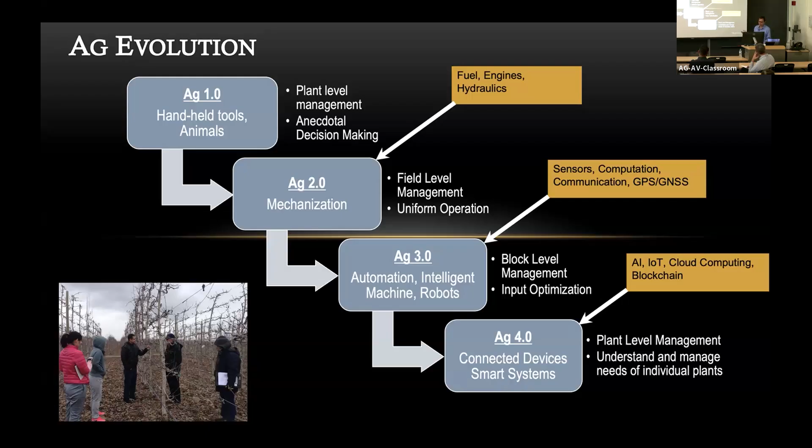So that kind of capability brings us to what we generally call agriculture 4.0, or fourth generation of farming, sometimes also called smart farming. So going back, bottom left, I'm posing some 10 years ago in my village, again, in the mid-hills of Nepal, in animal-driven agriculture. Earlier, I said that farming was that way when I was growing up many decades ago. Actually, it's still happening the same way.

So that brings me to this point that in most of the other industries, such as manufacturing, when we graduate from one generation to the next, it almost happens about the same time throughout the world. When I say that, in the larger scheme of things, it may be lagging by a decade or 15 years, but we're talking about advancement or graduation from first generation farming to second generation some 100 years ago when we developed these bigger machines. But some parts of the world, and in fact, actually many parts of the world, are still in the first generation of farming.

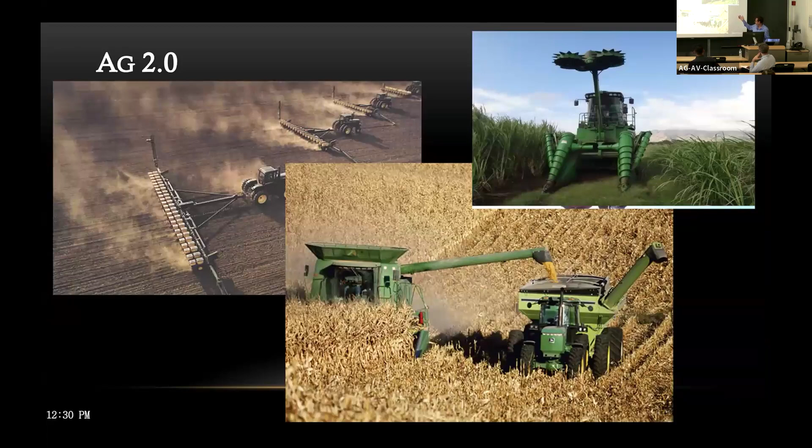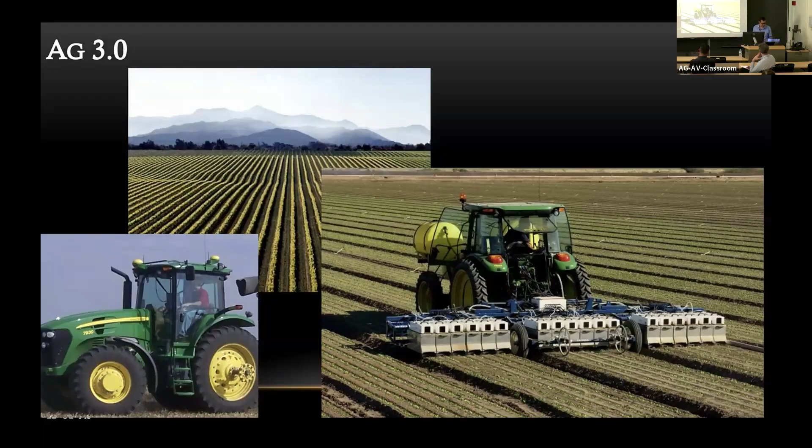That means all these generations, handheld, tool-based, animal-based agriculture to bigger machine-based agriculture, where we are using these really gigantic tractors and combine harvesters and planters, these auto steering technologies I mentioned earlier, some other automated robotic machines for weeding, for example—there have been quite a bit of successes in automating weeding operation. All these generations of farming are happening simultaneously around the world. And that's kind of the interesting aspect of the agricultural industry.

And then when we put all these concepts and technologies together, that leads us to this next generation that we are currently in or are trying to go into, the fourth generation of farming, which incorporates the concept of precision management, management at individual plant level or very small units, so that we can maximize the productivity and quality of that individual plant or animal.

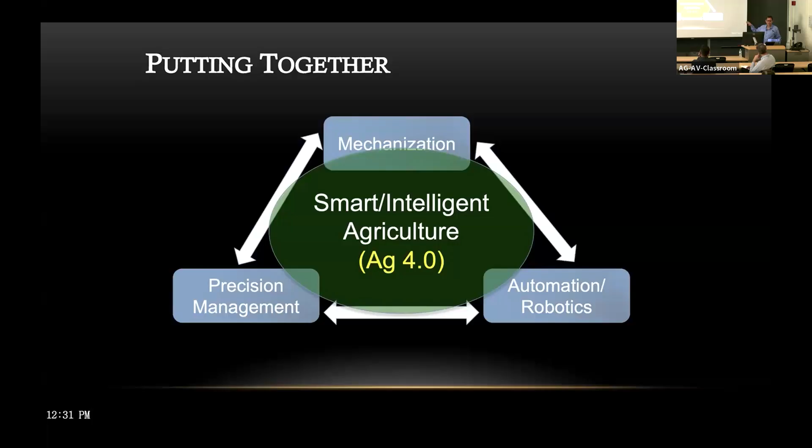With that historical perspective behind us, I'd like to talk a little bit about how artificial intelligence and cyber physical systems interact and help us in farming. CPS stands for Cyber Physical System, which is basically a connected world where sensors, humans, machines, plants, animals, soil - all things are connected to each other and talking to each other. Cyber physical system infrastructure provides us that capability to connect everything within farming.

Then these technologies can be used in almost everything that we do in our lives, and agriculture is also not an exception. We do utilize these technologies to perform plant and environment assessment, make farming decisions, implement those decisions, and analyze the outcomes.

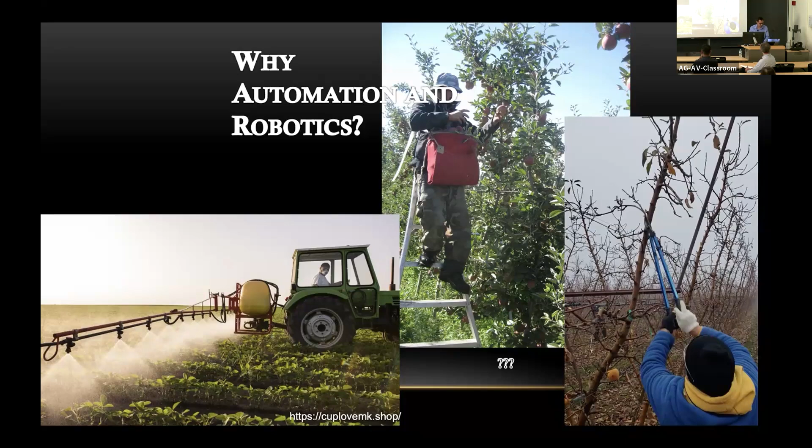And we would like to create jobs in manufacturing, supervising, monitoring, and maintaining automated machines, while having these jobs completed by those machines. So that's the philosophy and the motivation behind what I do.

There has been long research and development in this area, but only limited commercial success. A few areas are making progress, such as automated robotic weeding. But there are a lot of other areas, such as robotic picking of fruit and vegetable crops, where we have not been successful so far in commercially adopting those technologies. That's mostly, in my opinion, due to accuracy and robustness issues of these machines.

There might be a robot that can pick only 60 or 65% of the apples that are there in an apple tree. Among 100 apples attempted to pick, it might only pick 80% of them. So these are the accuracy issues.

In terms of robustness, there might be a robot that works with red varieties such as Gala and Honeycrisp, or Cosmic Crisp from Washington State, or RubyFrost from Cornell. But if it is Granny Smith or Golden Delicious, it may not work. Just as an example.

That's the robustness issue. Speed - we as human beings are really fast. Workers in these fields are really fast. That's just one aspect, and eventually it comes down to economics, which I'll talk about next. But when we talk about speed, any guess how fast workers pick apples in commercial orchards?

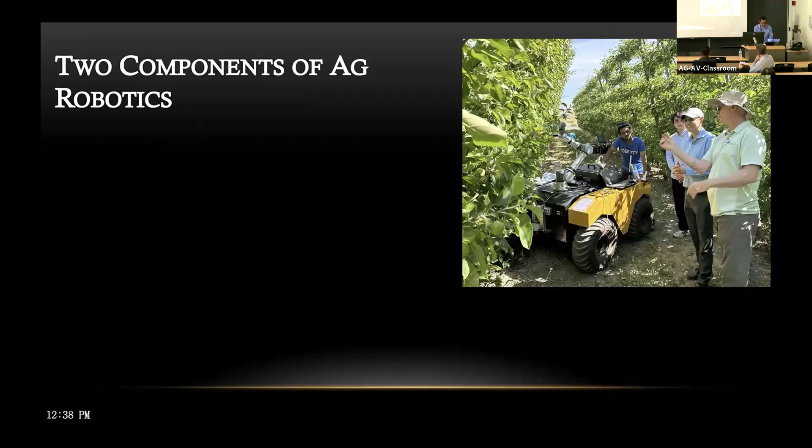There are two primary components in robotics as it applies to agriculture: navigational robotics, which are almost like self-driving cars, and manipulative robotics, which I'll call 'self-doing.' Self-driving and self-doing. There is a vehicle that can drive itself around orchards or other agricultural fields or animal farms, and then it also has to be able to do things by itself, such as picking apples, pollinating flowers, pushing hay, or sensing animal temperature, whatever that may be.

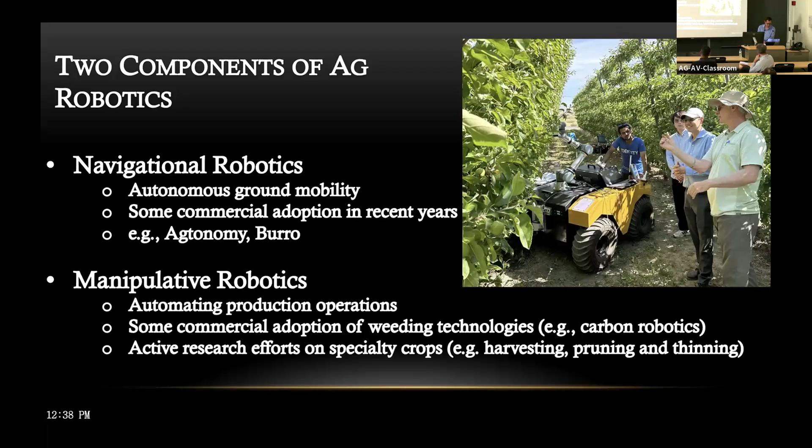There have been a lot of advances on the navigational side. There's still a lot of room for improvement, but on the manipulative robotics side, we're still in the early stages of advancement, and as I mentioned earlier, we don't have very many successes for commercial adoption yet.

Let's talk a little bit more about navigational robotics. Early efforts in the 90s and 2000s led to commercial successes like auto-steer tractors. They are mostly based on GPS or GNSS, Global Navigation Satellite Systems-based techniques, with some vision-based or camera-based techniques as well, but mostly current self or auto-steering techniques are based on GPS.

But when you're just using GPS, there is a tractor driving down the field - it has the GPS track, so it can keep the tractor within tree rows, apple tree rows for example, in apple orchards. But if there is somebody in front of it, it will just run over them because it doesn't have any vision-based local understanding.

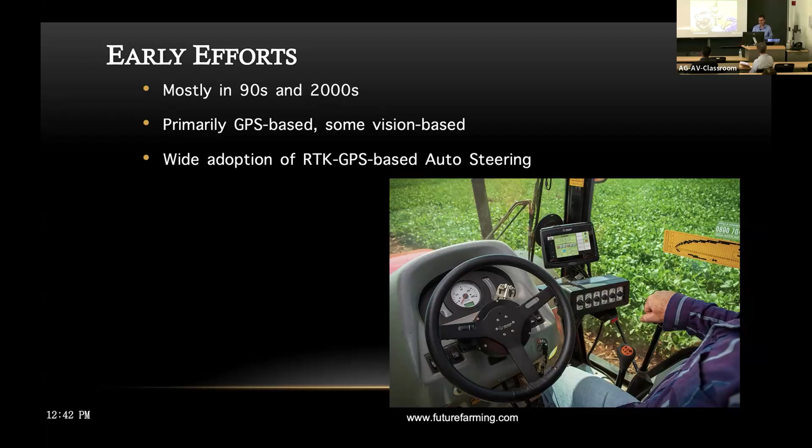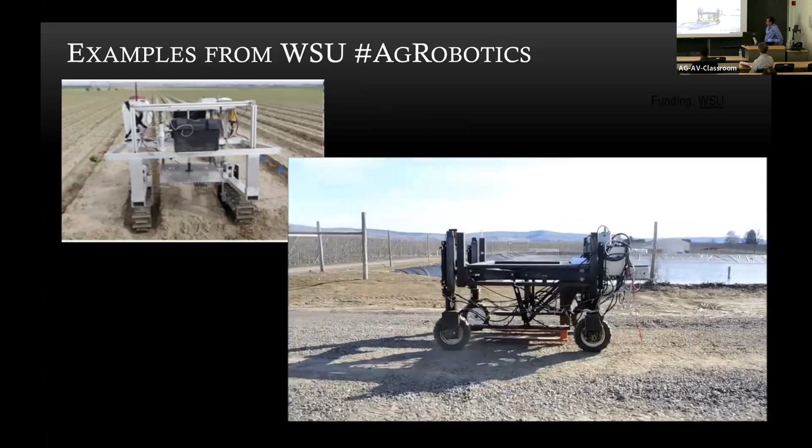There's wide adoption - as I mentioned earlier, about 60-70% of tractors sold around the world, I was told, are already equipped with this kind of technology. Here is an example of early efforts in my lab to develop a navigational robot that can find its way into orchards and pick apple bins, a container of these harvested fruits.

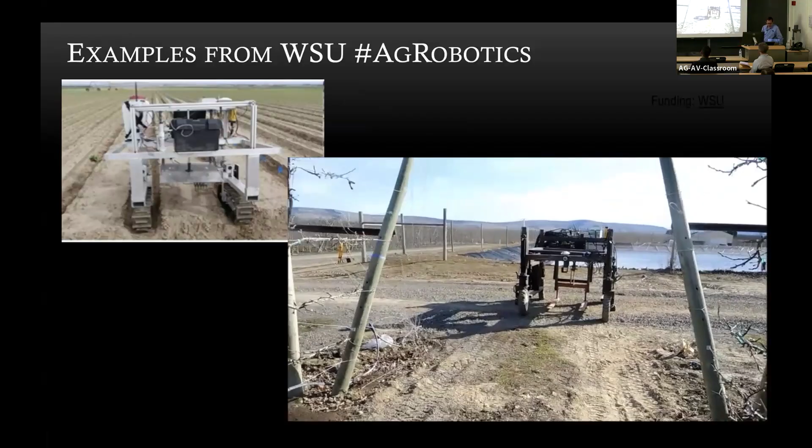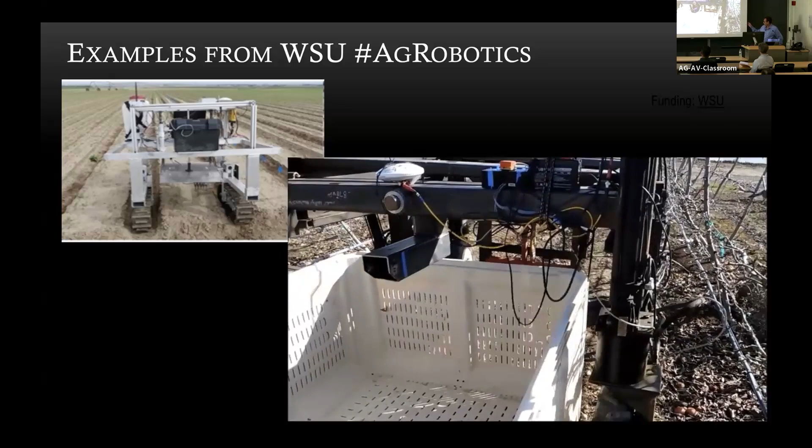So this was some 10 years ago. It has a LiDAR sensor, but it's also mostly guided by GPS. It has some positioning information so that it can go to those bins. This is empty right now.

We're testing in the winter, as you can see, but the goal is to have this robot go into the orchards, pick these full bins of apples after they are harvested—behind the harvesting crew or harvesting robot at some point in the future—and then bring them outside into the loading areas.

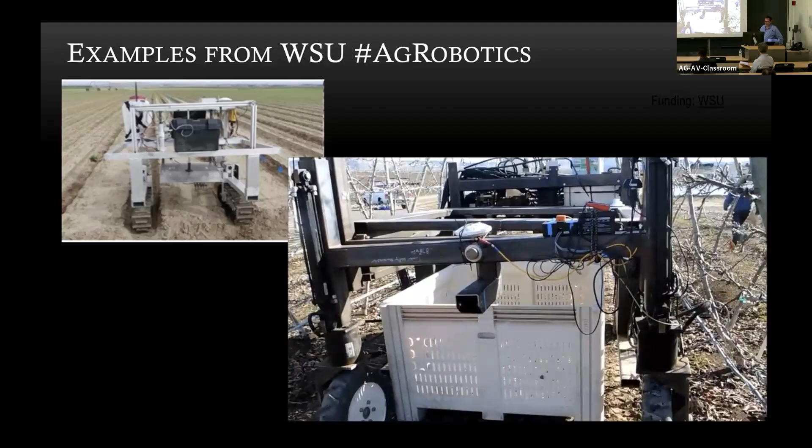Recent efforts in ground autonomy or navigational robotics include the fusion of GPS and vision systems, so that we have larger scale understanding of where we need to go, but then local information from cameras and LiDAR or laser sensors so that we can detect obstacles and avoid them.

There have been companies working in two kinds of technologies for navigational robotics or self-driving in agricultural fields. One is to retrofit existing machines. Companies such as Sabanto, Bluewhite, are coming up with kits that you can install into your existing tractor, and that tractor becomes capable of finding its way around.

And there are standalone machines such as the machines from John Deere, Guss, Monarch. Monarch is an electric tractor company. They also have a goal to have these machines be completely autonomous and find their own ways in the fields.

Successful applications of these navigational robots include smart spraying. There are robots that can find their own ways into the orchards and apply various kinds of chemicals. Weeding robots, such as the machines from Carbon Robotics, have been pretty successful as well.

Logistics for agricultural produce—I mentioned that earlier for apples—there are smaller robots moving harvested grapes and blueberries and other products out of the agricultural fields into loading areas. So these are some success stories, still not broadly applied in farming, but we see some commercial penetration of these technologies into farms, and I only anticipate they will go bigger in the future.

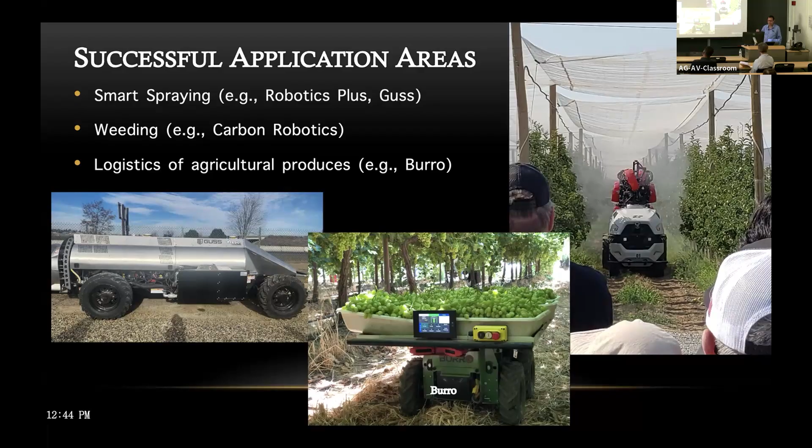In recent years, we also added more capabilities into our own robotic system for apple bin picking. It's called bin hauler. Recently, we sent this robot to a competition, and we were one of the winners, and we were awarded some $10,000, which I left at Washington State, unfortunately.

I was thinking about bringing my students on a nice trip somewhere, but then I don't have money anymore.

But anyway, this is pretty sophisticated. It finds its own ways, but also detects obstacles, including humans, and can go around them.

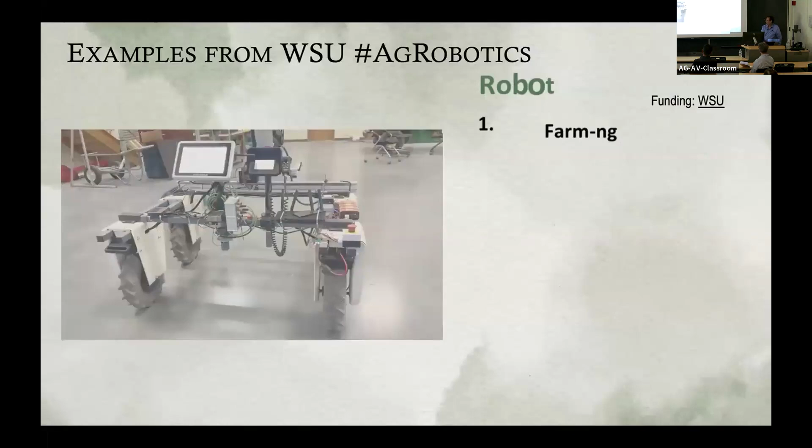Let's talk a little bit about manipulative robotics. How am I doing with time? You still have time. Great.

So we talked about self-driving. Let's talk about self-doing a little bit. I've been working in that space as well, and we're making more progress. You saw my latest robot—it can find its own ways, can detect humans, can go around them, and if needed, they can stop. So there is still a lot of room for improvement in that space.

Like my robot and any robot out there, they will stop in front of tall grasses. If we're a human driver, I would just push through relatively tall grasses, right? But these robots just find them to be obstacles and stop. If there's a hanging branch, little flimsy, you could push through, but it will stop—versus sometimes this branch could be pretty sturdy, a 3-year-old branch, so you don't want to push through. These robots don't have that kind of capability, for example.

And even in the guidance, row following is near perfect, but turning still has a lot of room for improvement. When it comes to open field, like from the loading station to the entry of the rows, you could take any possible route, and that's still an area for improvement. So anyway, a lot of things we could do, but there has been a lot of progress in that space.

But in manipulative robotics, we are still quite far behind. There are a lot of efforts in this area around the world.

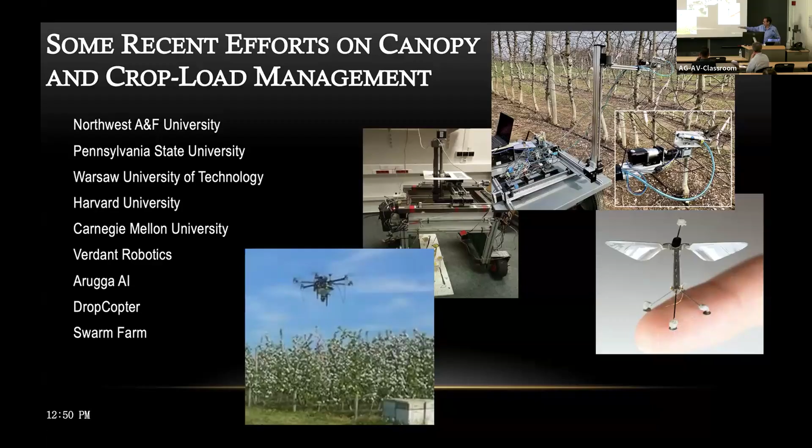They have their own challenges. The really tiny robots and power and endurance have been really challenging. But then more conventional robotics, like using arms and hands, we're doing a lot of kind of conventional robotics in pollination, pruning, thinning, and other aspects of farming.

In this mix, my research program in the last 15 years has been putting a lot of effort as well, trying to improve some of the limitations of these machines in speed, accuracy, robustness, and cost. Much of the work that I'm presenting was conducted at Washington State University, that's where I spent 15 years until about 5 months ago.

Before getting into the machines and robots that I work on, I wanted to briefly summarize the more fundamental pieces that go with the robots and help them be more robust and reliable. In my research program, early on, I spent a lot of time understanding human-machine-plant interactions.

And if it is animal agriculture, maybe you could add animal interaction. But my focus has been, for example, understanding how human pickers pick apples. What is the motion involved? What are the forces involved in each finger? And utilizing that information to design robotic hands that could be as simple, but also able to effectively pick fruit.

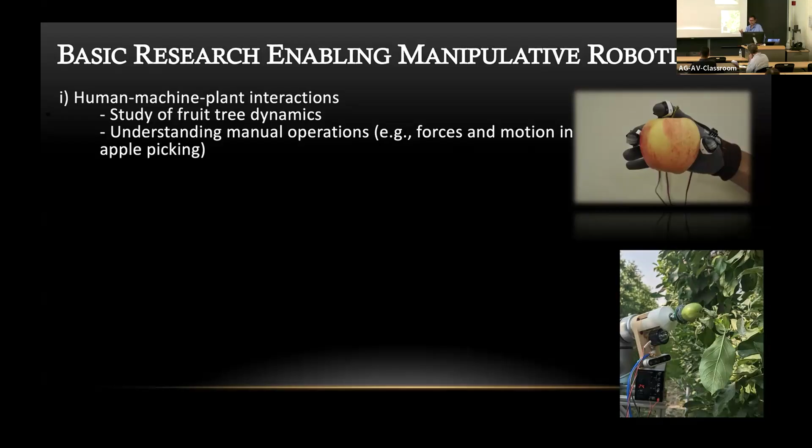I've also been working a lot on optimizing machine vision systems or computer vision systems for outdoor applications in orchards and vineyards. Early on, when deep learning was not there—and many of you perhaps have worked with deep learning models one way or another, including ChatGPT, for example.

There are a group of deep learning models based on what we call convolutional neural networks. Those are used in image processing, and that is the fundamental of everything we do in robotics for agriculture.

Before those advancements, machine vision was a real challenging problem and a huge bottleneck. We were using artificial lighting, creating tunnel-like structures in orchards and using artificial lights to create uniform lighting so that sunlight would not bother. We worked a lot at nighttime, when it is better, more uniform with artificial lighting.

But then with deep learning, we're much better. We don't have to have a tunnel around trees anymore, but we still sometimes use artificial lights and very fast shutter speed to minimize interference from external lighting.

We also do a lot of optimization of AI models for agricultural applications. In recent years, we've been looking into developing AI models for differentiating hard versus soft obstacles in farming, whether for robotic picking. I need to know if it's leaves, I can push through. If it's a branch or trellis wire, I need to avoid. Same thing on the ground: if it's grass, I can push through; if it's a rock, I have to stop. Also, if it's a really rainy season and there's a lot of puddling or muddy surface, do I go or do I stop? Those are the kinds of challenging questions I'm trying to answer.

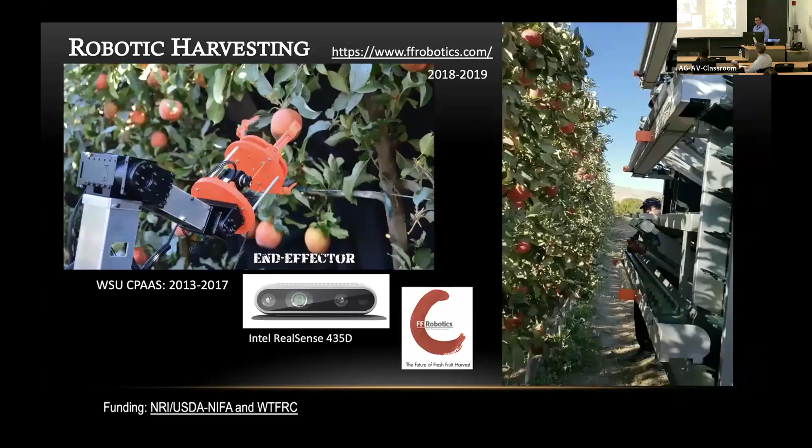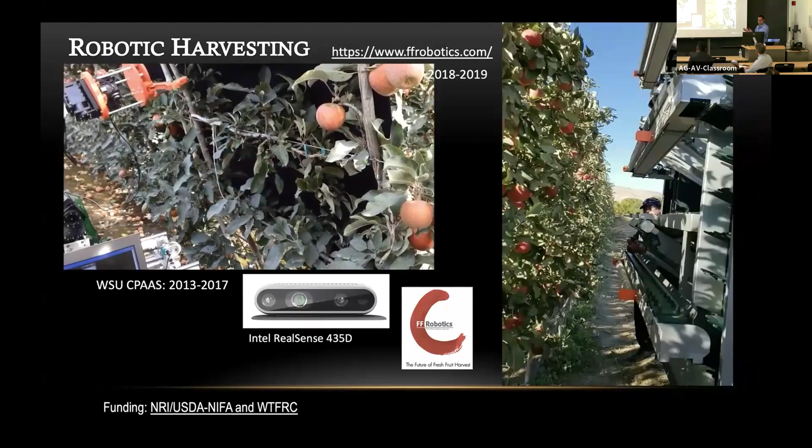So let's look at some videos of the prototypes that I have developed, using some of that fundamental work plus system integration into a complete system that goes into the field and does what it's supposed to be doing, except it's not quite there yet.

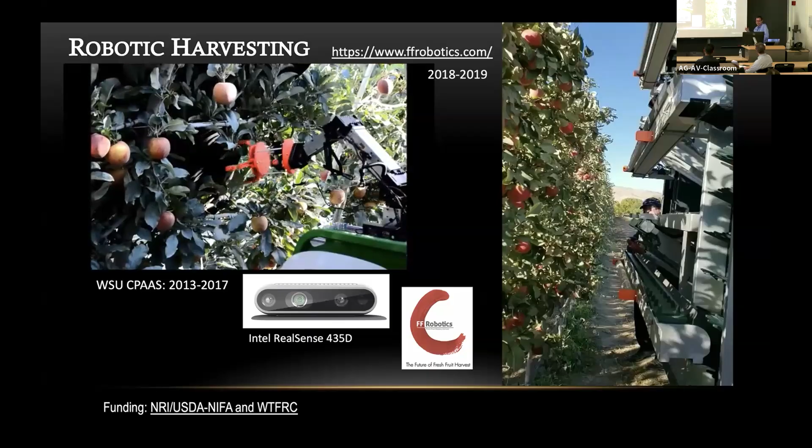In the next couple of minutes, I would not be really talking. I was saying, Dan, earlier that I work in physical systems, which kind of speak for themselves, so I don't have to explain a whole lot - versus there are a lot of seminars where I have to be really engaged.

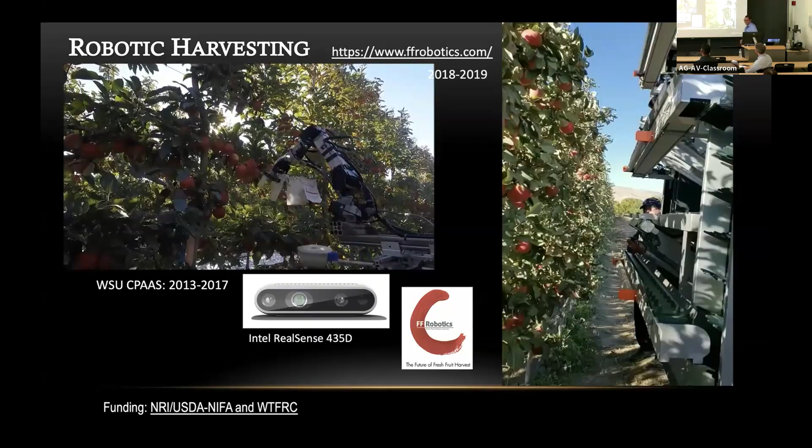I'm wondering, is the bin right under, or is there no bin there? Very good question. I'll come to that in a little bit.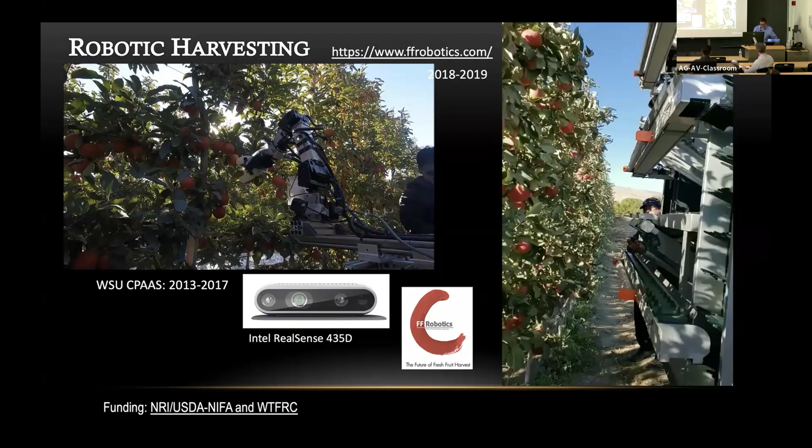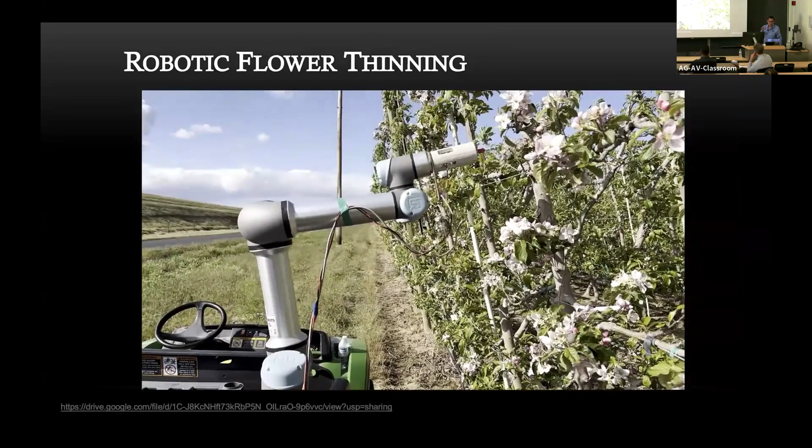So as I mentioned earlier, I have been integrating robotic systems for a lot of things in orchards. Flower thinning - this is an easier audience because I don't have to explain why we need to do flower thinning, I hope. And then pollination.

Now, maybe I need to do a little bit of explanation here because in the East, natural pollinators may be enough to pollinate our crops. In Pacific Northwest, we don't have natural pollinators. We hire, or they hire, a lot of beehives. And so robotic pollination becomes an important factor.

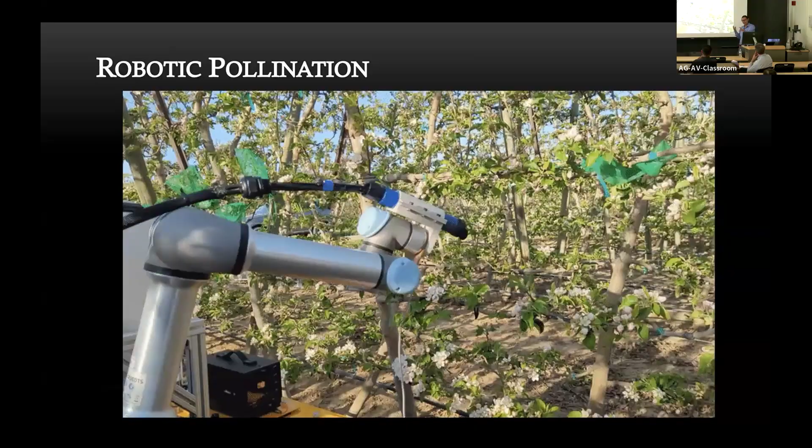More interestingly, with robotic pollination, I believe we can revolutionize farming because I can place fruit where I want, uniformly separated from each other in all parts of the trees. But then it is also accessible for my robotic picking machine. Now I can pick 100% of the fruit if I'm placing them correctly.

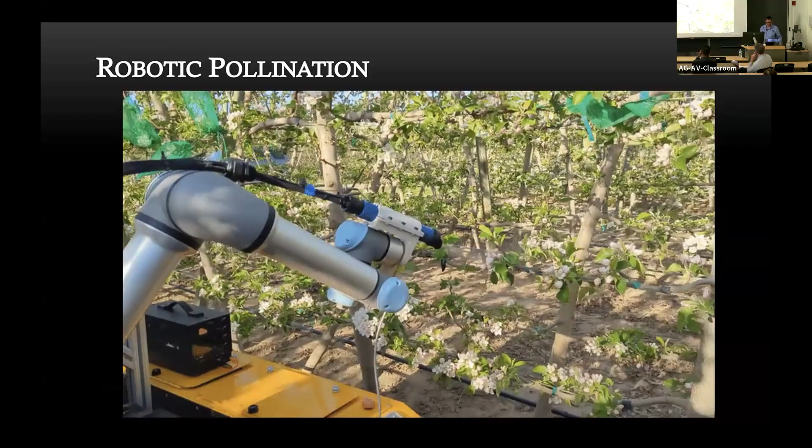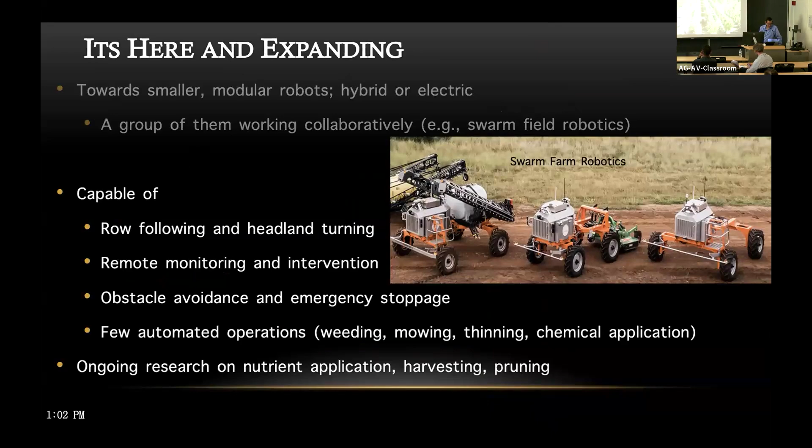So when we integrate manipulative robotics and navigational robotics, then it becomes an autonomous system for farming. There have been a lot of efforts in this area from private companies as well. I just wanted to show this video.

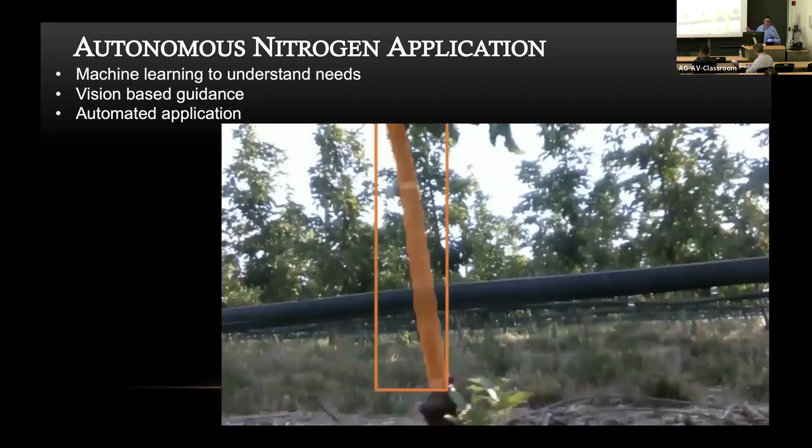This is my autonomous system for nitrogen application at individual tree level. It does sensing, decision support, and applies what it needs to apply to root zones using various kinds of sensing, image processing, and decision support models.

We've been doing similar work in strawberries as well. And then final thoughts - I think I ought to stop here. We're making a lot of progress, but there is still a lot of room for advancements and eventually potentially getting it to farmers' hands.

Total autonomy, in my opinion, is needed because if I automate picking, but I don't know how to send that fruit to a container bin, I would not be utilizing the machine. If I know how to pick, but this machine doesn't find its way into orchards, then I'm not done. So total autonomy - there are a lot of questions around it.

I mentioned most of this already. I just want to emphasize that with robotics, I think agriculture is as cool and sexy as computer science or electrical engineering or space technologies. And hopefully we can attract a new generation to contribute to this area, which hasn't been as attractive in the past, in my opinion.